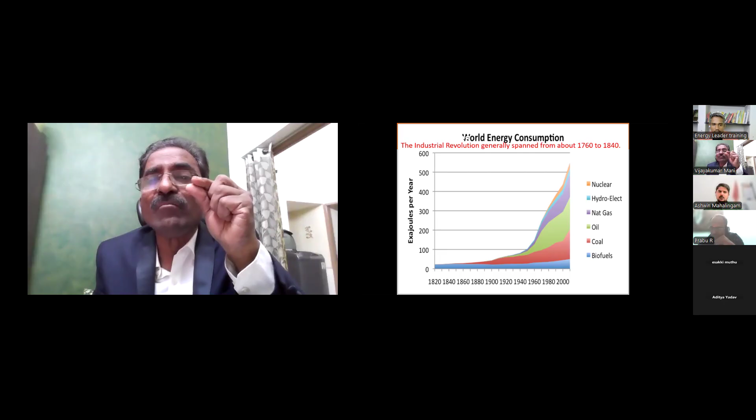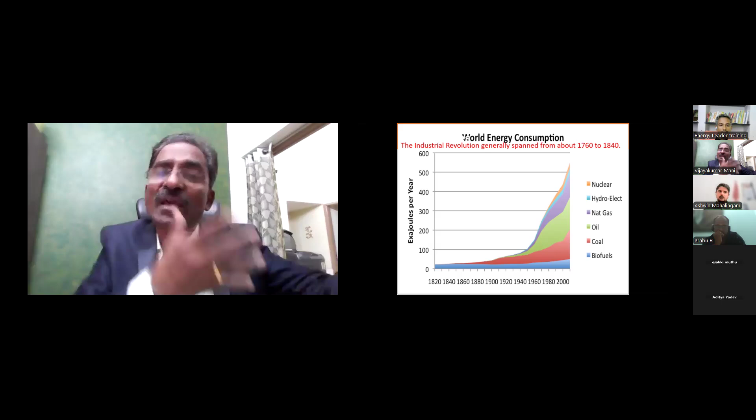If you see the world energy consumption, way back in 1760 to 1840 the industrial revolution took place. I studied this during my interaction with carbon footprint - somewhere in Antarctica they drilled holes inside the ice, went deep, found a small ice sample, melted it, and found the CO2 was very less. Over a period of time, after the Industrial Revolution, CO2 has increased more and more. Why did they take CO2 as a basis? CO2 exists for a longer period, that's why we call it CO2 equivalent. Why not take nitrogen equivalent? No, we take only CO2 as the equivalent - ton CO2 equivalent, written as t CO2e, where e is equivalent. Anyhow, we will come to those chapters.

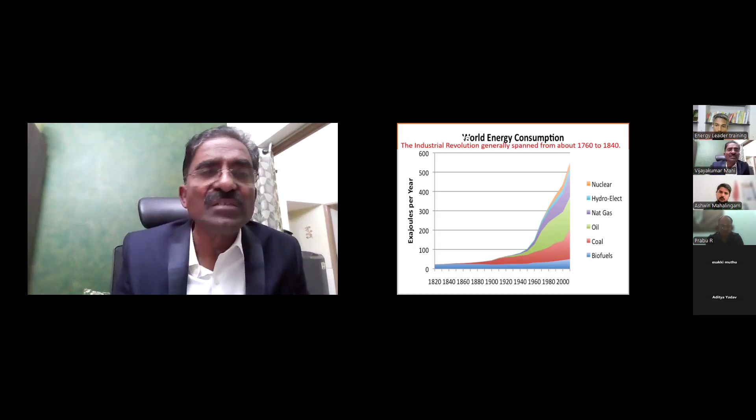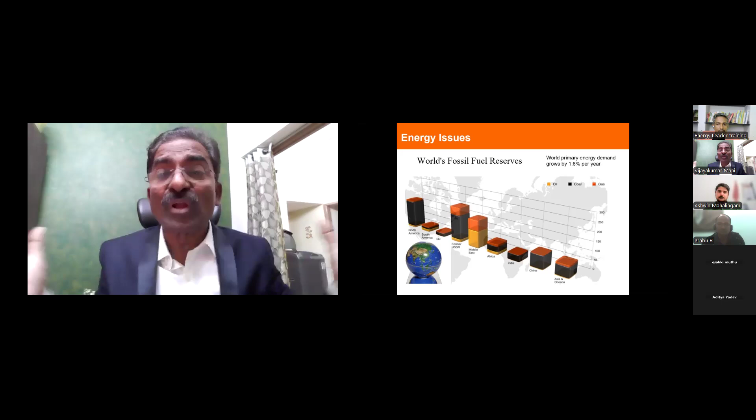India, as Modi ji has already said, has its 2070 target, and the whole world is looking at it. Various programs are being managed for this. Earlier, some 20 years back, energy audit was at a higher level, but now energy audit has gone down and sustainability is being talked about more. But unless we do energy audit, we will not be able to reach sustainability.

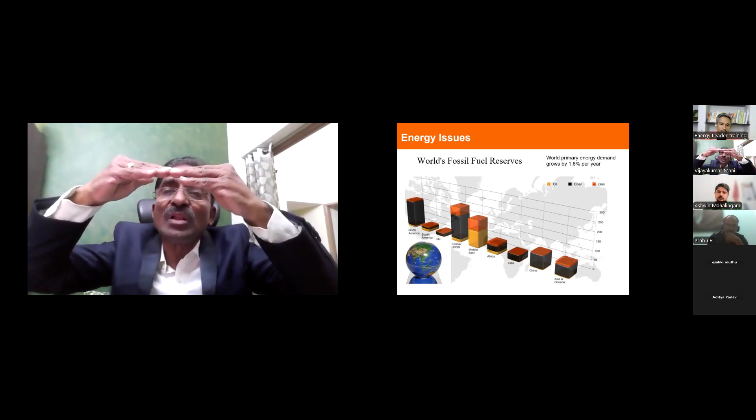People are not thinking clearly. Some people go directly to sustainability and find out their CO2 level is very high, and wonder what to do. Sir, why don't you do energy audit and reduce it? So people are coming back to energy audit. Now people are wise - they do energy audit first and then go to CO2 level, because with every energy audit you save energy, which means you are able to save CO2. Let us go to that.

I'll show you that. Oil will end by 2052, that is the prediction. Gas will end by 2060. And coal will last only for another 70 years.

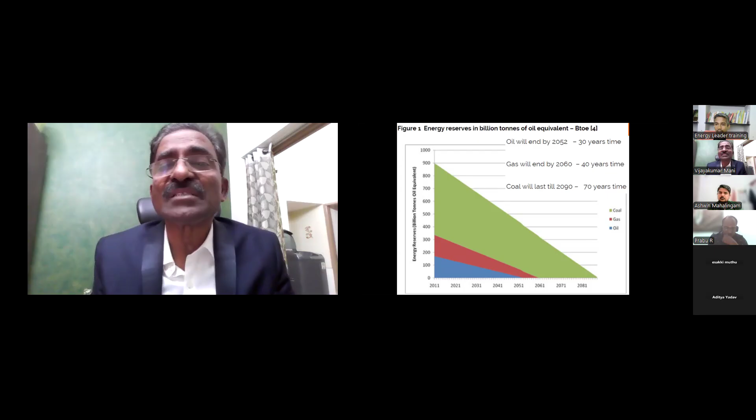What about the next generation? Somebody says, sir, I am going to live only for another 10, 20 years, so why worry. No, it's not like that. We should leave the planet to the next generation without any disturbances - that is the thought process people should have as they live and move to the next level.

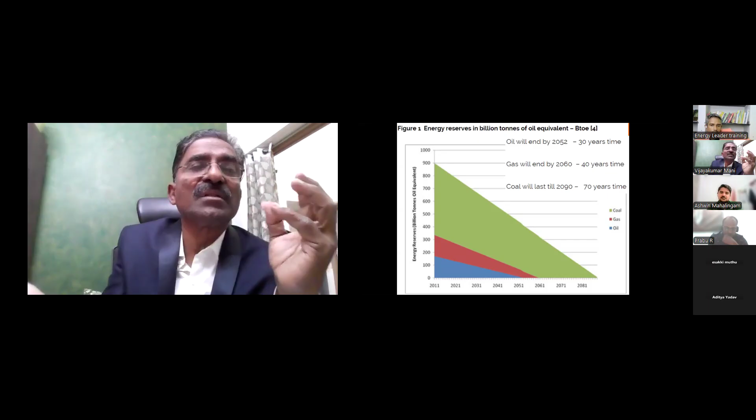One minute. Hello? Yeah, actually I am in a webinar, can I call you after some time? Yeah please, thank you. So other people are calling me asking if I'm in a webinar and can join. I told them to join - they will see me through LinkedIn and they are calling me through that. Anyhow, I told them to join.

So nowadays, though hydrogen is very costly, people are slowly adopting it because in a longer run it becomes cheaper. In all other countries things are going on. I am also an advisor in one company, H2 Next, which manufactures electrolyzers - water is converted. Recently I've been to a Butterfly gas stove manufacturer.

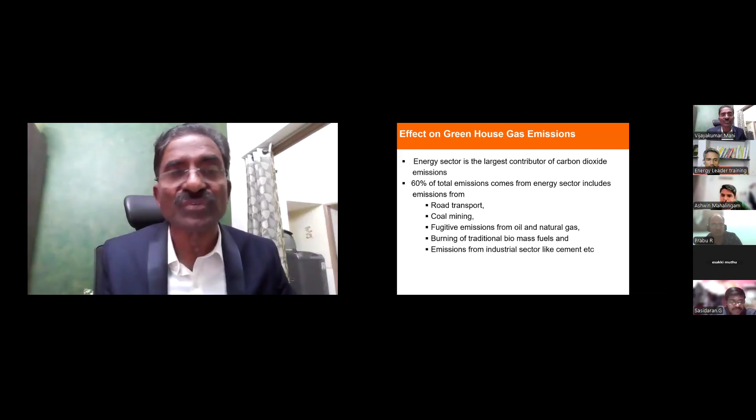So now we talk about greenhouse gases. Sir, why suddenly greenhouse gas? Because in energy audit, we need to know that when you are thinking saving energy means saving money, that is only a part of it. We are also contributing to the planet through the reduction of CO2 emissions.

Nowadays all companies are concentrating on energy, and adding one more column: I have reduced CO2 emission. That is the practice nowadays. Slowly they will tell you, sir, we are into two systems, 50001 and 14064 part 1. This is how things are slowly shifting towards that.

And now there is a carbon tax. Already EcoVadis is there, I think people are aware of it. EcoVadis in your company - ESG systems - they upload and get a certificate: platinum, gold, and all those things. I'll tell you all those things.

So these are the types of gases emitted. Carbon dioxide largely from fossil fuels, CFC - chlorofluorocarbons - that is from your air conditioners, and perfluorocarbons from solvents, and SF6. Nowadays SF6 breakers are not being used, or in the latest technologies they are adding some more gases to bring down the sulfur hexafluoride. The effect of sulfur hexafluoride on the atmosphere.

This is more harmful than CO2, but its life is very less. That is the reason why CO2 is taken as the reference value, because its life is higher, more than 100 years, 200 years, 300 years. Then hydrofluorocarbons from the foam products - these are all the various side effects from the products.

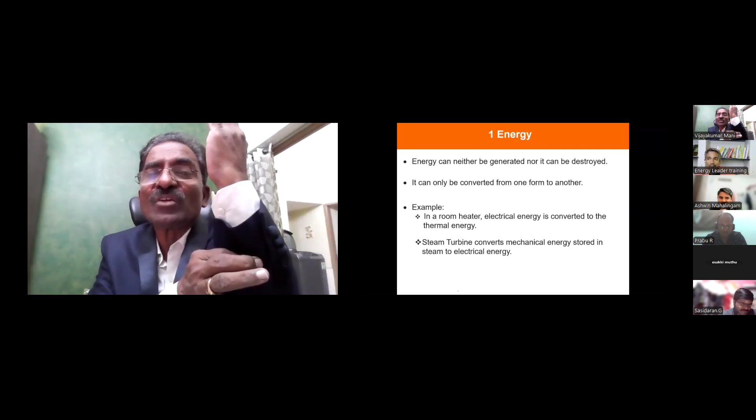You know, RYB has a 120 degree phase shift, and the central neutral point is 0. In mechanical engineering, what is that? I have a flag, I tie up 3 ropes, and the center point is 0 - what is that called in mechanical engineering? Lami's theorem. Make a note of it. Lami's theorem states that 3 forces acting at 120 degrees phase shift have a center point of 0. That is Lami's theorem. So a lot of things are there.

If you see, there are types of energies: primary energy, secondary energy, non-renewable energy, and renewable energy. You will be knowing this, no doubt at all. Renewable energies include sunlight and wind. I have seen that in China it's not only wind - there's tidal waves, in the sea and beneath the sea.

In China they are trapping a lot of energy. They have waves, they put some pedals, and the pedal moves up and down. Because of that they put on a solenoid and get the energy. Sky is the limit - you have to think of it. Non-renewable energy is like fossil fuels, and nuclear is also non-renewable energy, but of course we are using it. Natural gases, coal, and all those things are also non-renewable energy.

So for renewable energy, you can see all these things: biomass, tidal, hydro, geothermal, wind, and solar. Renewable energy can be generated continuously, practically without decay of source - that is the meaning of renewable energy. Solar energy, of course, we can use directly. There are 2 types of solar: one is known as PV solar, photovoltaic.

Another is concentrated heat. In Pondicherry, if you go there - what is that villa? I forgot, Auroville - Auroville, you're right. I've been there. When the Bureau of Energy Efficiency conducted our first exam, they took us to that place, Auroville. We went there, all the energy auditors who attended the exam, and we saw the dish - that concentrated dish where sunrays come.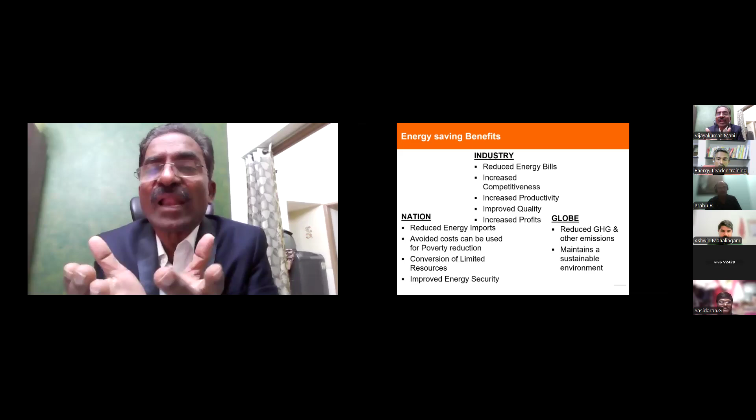Now I am still not come to special process. Now what is a special process? Any special process, suppose say welding. I'll give a colloquial example. Suppose your rice, you are cooking rice in an open vessel. Every time you take some 3 samples and check, oh still take 5 minutes to boil. Then after 5 minutes you check, oh it will take another 2 minutes to boil. This is known as normal process.

Coming to industry, I have a rod, 100 mm rod, I want to convert to 40 mm rod. I'm turning it, I stop and see the diameter. Okay, then I turn it again, I see the diameter. This is a normal process.

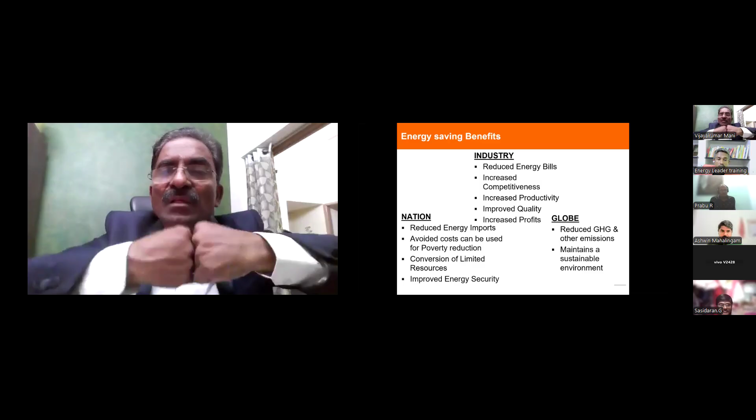Now, coming to welding, I weld it. At welding, I pass 100 amps, it is not joining. Then I put 120 amps, now it is joining, okay. Now after welding, process is okay. Now I'm giving one, one place welded, and it has to come to the second place for putting the bush. I'm having a doubt whether this weld is okay or not. Can I break it? If I break it, can it be used? It cannot be used. A special process is a process after completion of which, if I want to see the efficacy of that process, I cannot use it in the next process. That is known as special process.

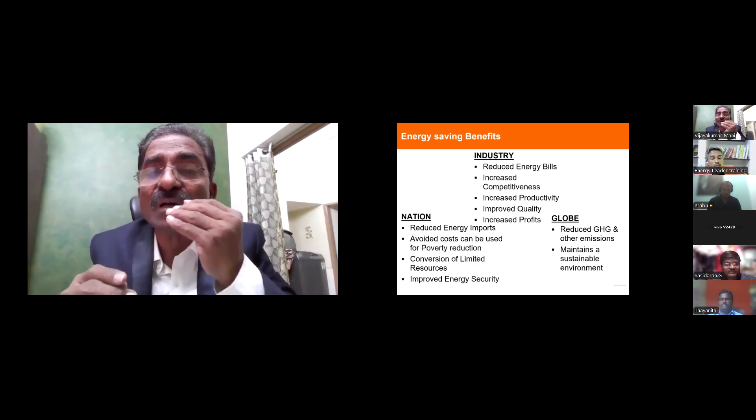I'll give a colloquial example. I want to prepare a cake. In a cake, I have the recipe - sugar, flour, sweetness, then pagam, then jaggery and all those things. I'm preparing it, I taste it. Not okay, oh my goodness, my recipe is not okay. Then I have to do iteration. How many iterations? Add more sugar, add more flour. In Tamil, I can say adarasam, there is one adarasam.

In adarasam, we put flour, white flour, rice flour, and jaggery, pagam. You mix it up - how many times do you do it? The new girl, after entering into married life, if she has to prepare the jaggery adarasam, she finds it difficult to come up to a level. It takes so many days and months to achieve that competency. The competency is coming here in the picture.

The standard says competency. Because when you go to a hotel, oh, food is good - what happened? The cook is good. Next day when you go there, hey, food is not okay - what happened? Sir, the cook has gone out, another cook has come. The competency is gone.

So here I'm talking about the special process. In a special process, you have to do iteration. Once you do iteration, you prepare a procedure known as validation of process. When people are doing validation of process, usually QA/QC people will do it, energy people don't come into the picture. Then I tell them, please add one column and write the energy. Every recipe you are adding and doing testing, add the energy. At one point when you say quality is okay, energy is okay - that is the place. That means your process improvement is there, small process.

So special processes need to be known by the electrical engineers. Mechanical people know special process, but they don't know the energy. We know the energy, but we don't know the special process. So it's not a question of electrical and mechanical - everybody should know the engineering.

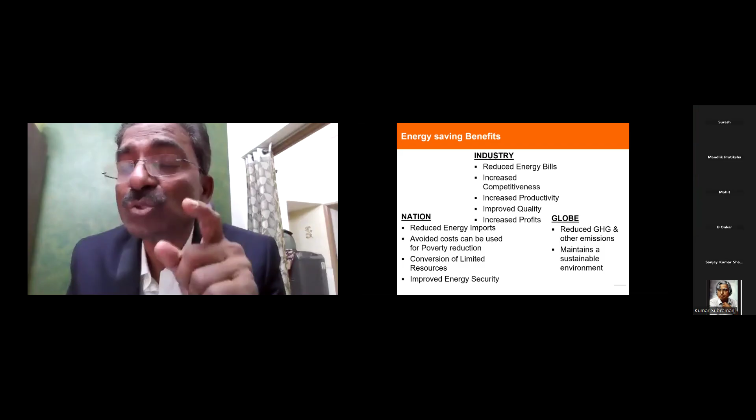You know why in lightning arresters zinc oxide is used? Do you know these gapless lightning arresters are made of zinc oxide? Why? Because its characteristic is that at a particular voltage it is an insulator, and at a particular voltage it becomes a conductor. That zinc oxide is sintered.

I've been in Hyderabad when I was with RITES, one company known as Oblum - they are manufacturing this gapless arresters. Then I was thinking, what is this? Magic is happening in zinc. Then I went to a training, I wanted to know heat treatment. I studied the heat treatment, I studied this sintering process. Then I came to know.

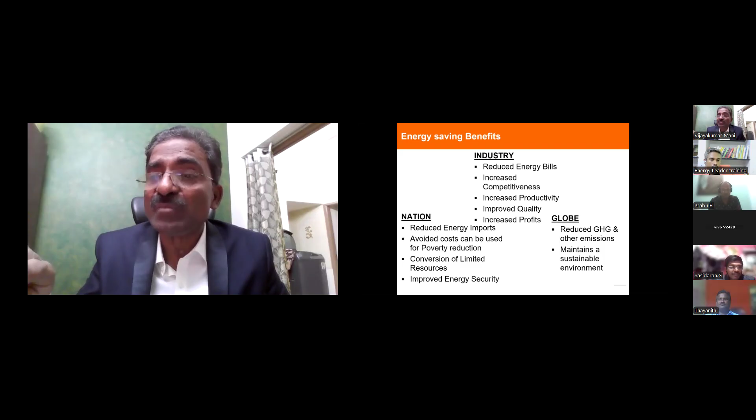I have experience in Gangappa cables in Hyderabad. These copper wires go through many special processes. I went to the lab, I went to production, took out 1 meter length of copper wire cable, put it in the testing room, cooled it for 20 degrees, and checked for the conductivity. It is not meeting the conductivity.

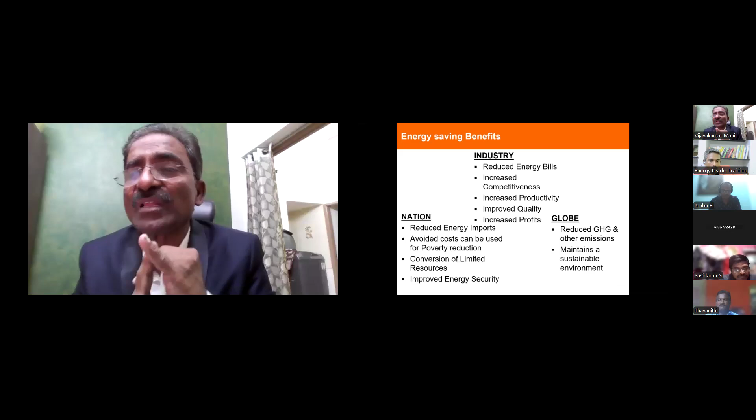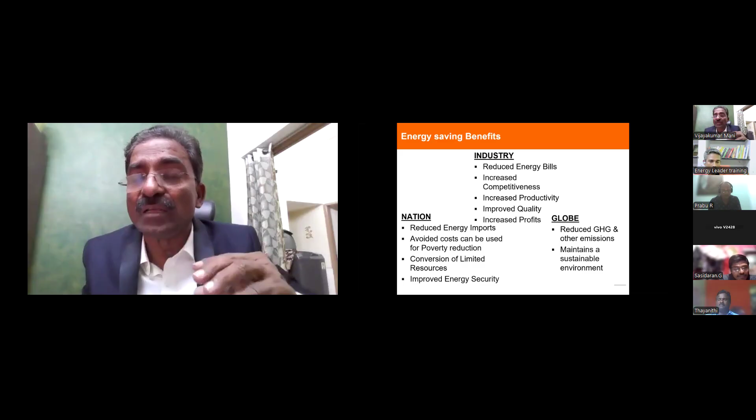I was wondering why. Then they sent this copper cable to the chemical lab. They found out 99.99% is pure. Then when it is pure, why is the conductivity low? Then we came to know it is hard drawn - 10 mm, hard drawn to 2 mm, 3 mm. When hard drawing is happening, the surface gets hardened. When the surface is hardened, you need to go into the metallurgy, the formation. Then what happened? I studied it.

Then I found out whenever you are purchasing copper cable, copper wire, it should be double annealed, tough pitched copper. That is a specification - double annealed, tough pitched copper. That means it is to be annealed, that is a special process. The surface heating, the surface hardness has to be removed through the annealing process. Then it becomes normal copper. Then they found out the defect, then it was once again annealed. Then it went through - it gave correct conductivity. So every process is important.

Okay, now coming to this - improved process, increased profits. Then what happened to the nation? Reduced energy import - you need not get electricity from other states, your own state you can use it. Avoided cost can be used for poverty reduction. Some countries use the saving energy to reduce and give it to poor people, they reduce poverty. Conversion of limited resources, improved energy security.

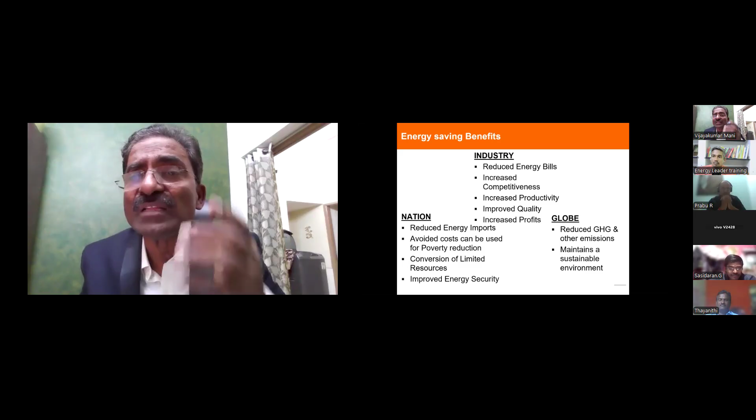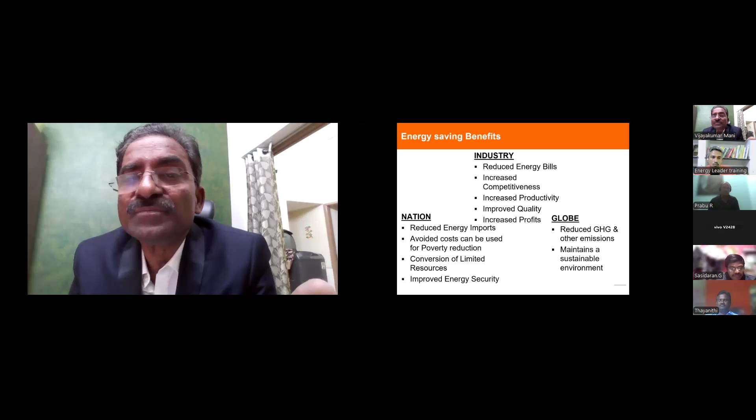As a global matter, there is no use telling that I've saved money - it is reduced with GHG and other emissions, maintaining sustainability, this is the key word. This has been done way back in 2011 itself. I have studied this, but I was not having the focus. Now only in the last 5 years I'm having focus on this GHG. Since 2020, during the COVID period, I found out this, I started learning this. But the real focus has come in the last 2 years. But I was reading that.

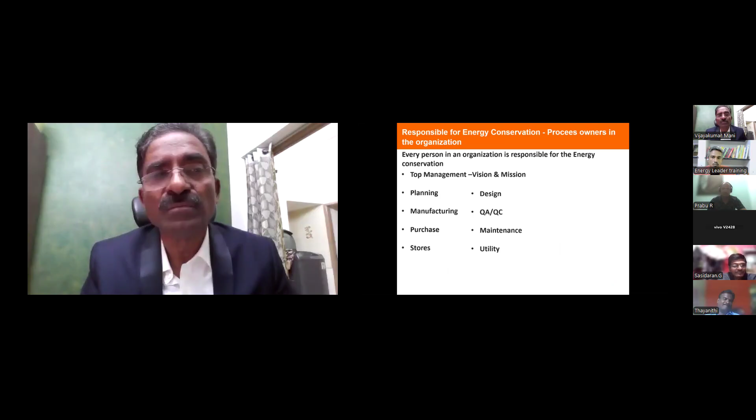So who is responsible for this energy? Some people will say maintenance. No, everybody - top management, planning, purchase people. Purchase people have to purchase energy efficient products. Stores people, production, everybody has to have a consciousness about energy.

From mechanical engineers, do they know about the Sankey diagram? Have they come across it during their studies? Somebody can answer so that I'll be happy. Yes sir, it was covered in the BE course, sir.

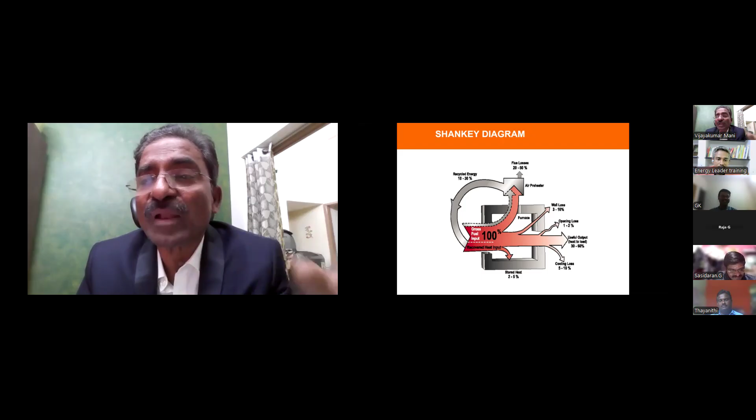I know that because I'm always living with the books. Not only do I do it practically, but also when I go to any company, people call me saying 'professor is coming here, he's a very dangerous fellow.' But I am not worried about that because I am what I am.

You should see - suppose a pump is not meeting requirements. I went to Kirloskar Pumps way back in 83, 84, 85. The pump was not meeting the requirement. He was scratching his head. I said, why are you scratching your head? Refer to NTP - Normal Temperature and Pressure. It was at a hilltop, at altitude. We brought it to sea level and atmosphere conditions - then it was meeting the requirement through extrapolation. Performance has to be extrapolated.

I'm doing a heat run test on a motor with F-class insulation. How do I know? We need not just nod our head that it is F-class. No - doing a heat run test alone is not sufficient. Strip the machine, check what insulating material has been used. The type test report will give this complete data. Exactly, the type test report alone. You personally go - I've been to many companies.

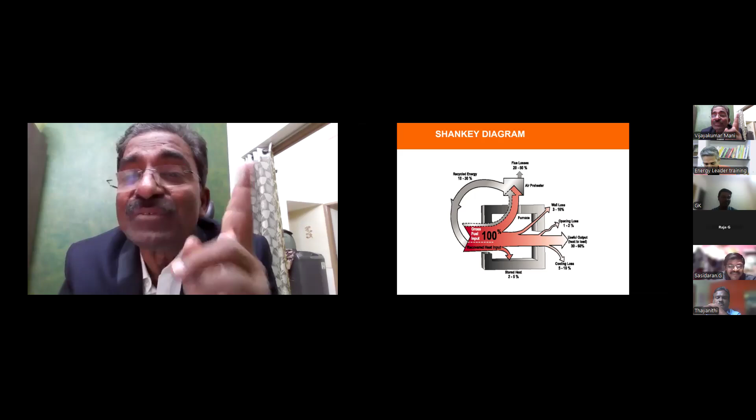I've stripped the machine. They put Hylam pieces. Do you think Hylam is F-class or B-class or H-class? What is that, Hylam? Hylam - there are two materials, paper-based and fabric-based. Hylam is the name of the company. You need to ask them what they have used.

If they used paper-based, it is B-class only. If they used fabric-based, then ask what varnish they used. If they used B-class varnish, it is B-class only. It's like a basket of tomatoes - one tomato is spoiled and the whole basket is spoiled. Similarly with insulating material, anywhere you see B-class, and if you say it is H-class - no, it's all totally B-class. That's what the British standard says.

People ask me when I go - hissing noises coming, why is there a hissing noise in the air? Sir, there is a leak. How often? Sir, every 15 days we are doing an air leak test. Then what use are you getting today? Sir, somehow it is getting managed. No - that means you are not catching the real point for the air leak test. Okay, so in an air compressor, calculate the flow per tank.

27th case study - have you done phosphating? In phosphating, I've used an air compressor. I never used an air compressor. The costliest energy in the world is the air compressor. Efficiency of the compressor is only 30%. 70% is going as heat.

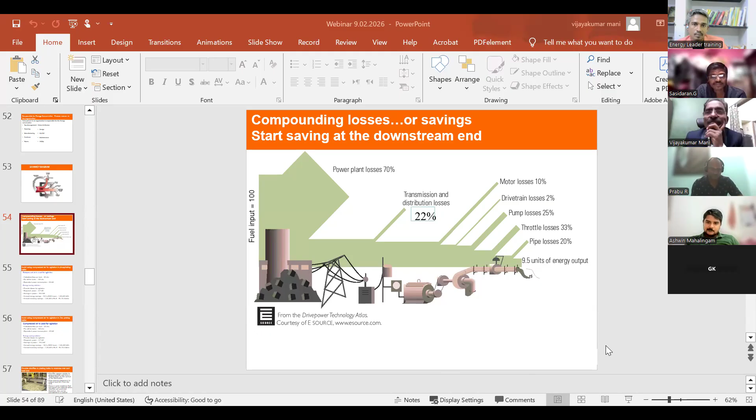There's a discussion about screen sharing issues - compressors, presentation screen, pressure vessel, full screen mode, and troubleshooting with function keys like F5, F6, F8 to get the screen visible, with participants confirming what they can see on their displays.

It's not necessary as a certification body, I used to go through the documents and say clear, but I was not keeping quiet. Got it?

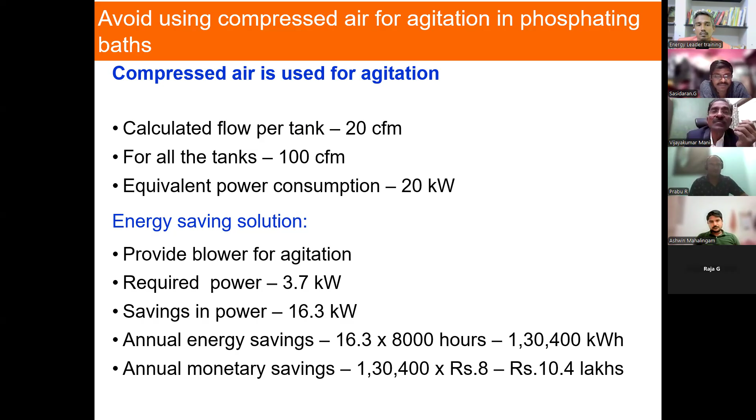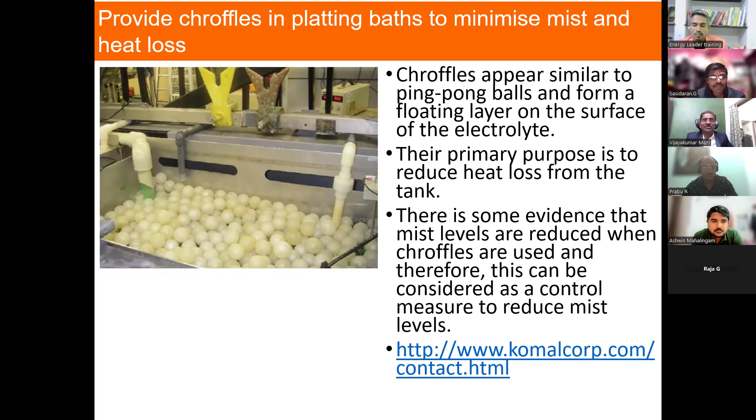The next one is the zinc plating, and the other one is in open tank - don't allow the steam to go out. Have these polythene ping-pong balls floating on the surface of the electrolyte. You can get it from this - I have given a website, Komal Corporation. You can contact them and get this material and put it on your plating bath, heating bath, so that it will not go through evaporation. Minimize the mist and heat losses.

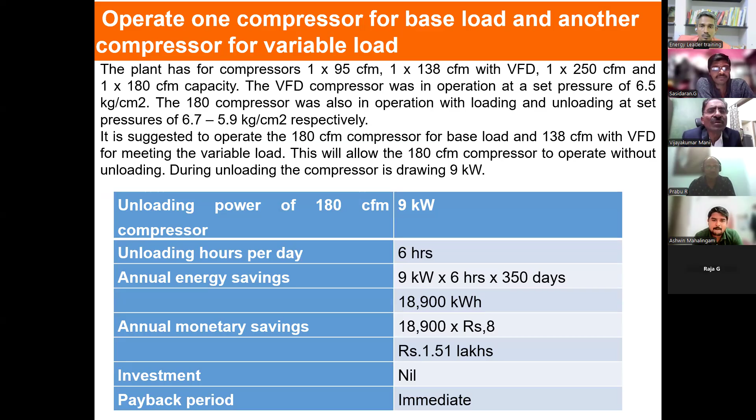Got it? So here operate one compressor for base load, another compressor for variable load. Don't go everything VFD drive, sir. There is a formula that we need to VFD drive - whenever there is a change in speed 60% of the time, then go for VFD, because your money is getting wasted between VFD drive and normal drive. So I used to tell them, always have some base load, put that as one compressor, and another variable load, go with a VFD drive. You can save a lot of energy.

Then arrest compressor air leak periodically - that is the costliest, that's what I was saying. Arrest compressor air leak periodically. When you arrest it, in this one case study, they were saving around 3.7 lakhs per annum.

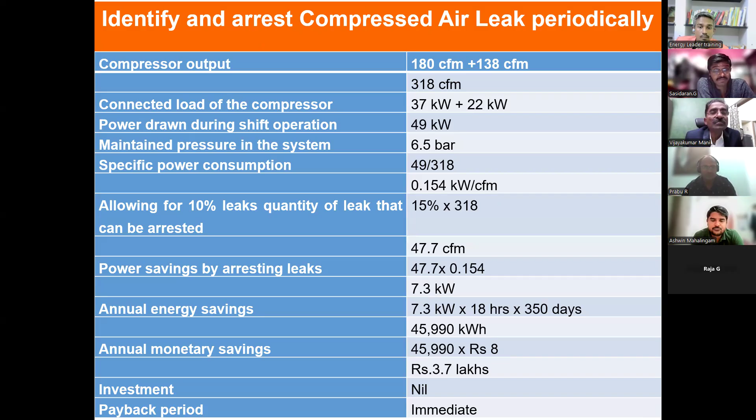Then enhance capacity - this I have gone through. One centering person, my goodness, they put the centering bath, this centering material in the heat bath. There was a space between the lower part and this. I said, why don't you put one more? And one more thing, this carrier material was 50 kg - let us say it is 10 kgs. Centering material is 10 kg and the carrier is 10 kg - which will absorb more heat? The carrier will take 50% heat and the centering material will take 50% heat. Then you're wasting a loss - energy loss is there, am I right?

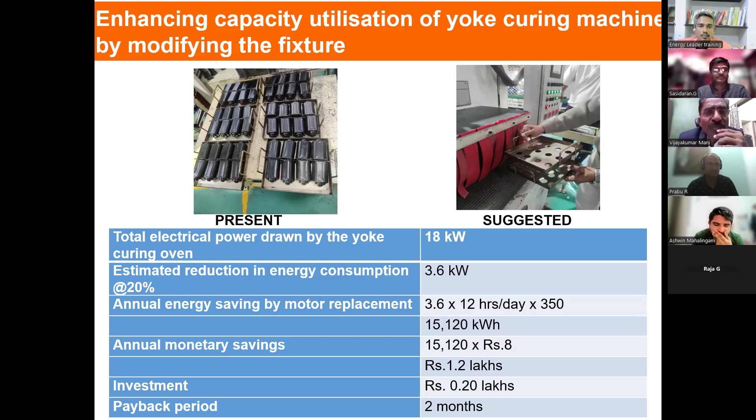Team members. Yes, sir. Yes, sir. All these small things, like convert hydraulic to electric.

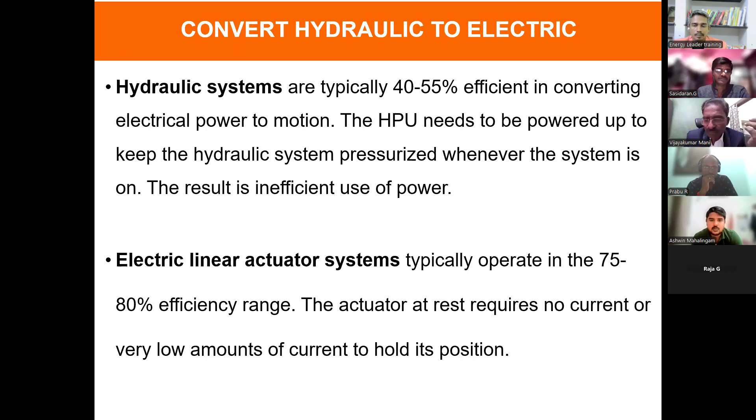I used to tell, never go for hydraulic. See, in hydraulic systems, the motor always continues to run to keep the hydraulic pressure. You'll be using NRV and all those things, but still the motor is running. Go for servo drives instead. There will be a lot of savings, around 75 to 80%. Huge savings. I'm giving a lot of tips on this one.

Convert press from connecting bracket machine from hydraulic to servo, that I have already seen. Then LPG heating to induction heating.

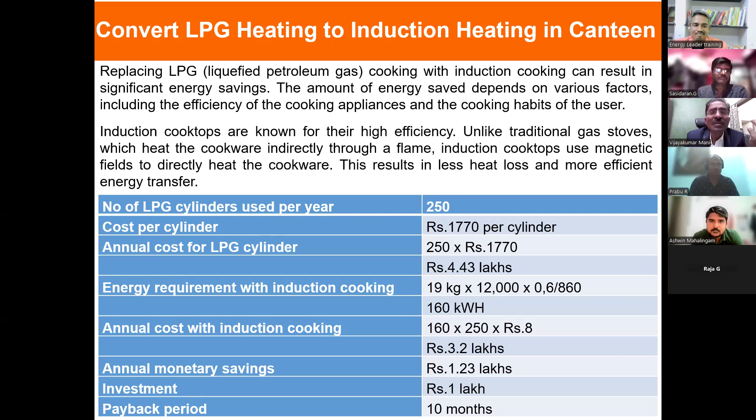Always use the pumps with the duty point. See the duty point of the motor and the duty point of the pump, both should join together at one point, which is the rated requirement for you, application-wise.

Sometimes I have seen some grand old technology. 'Hey, Baba, you want to lift that water to the third floor?' 'Sir, I require 2 HP.' 'Okay, no, it will be better you use 10 HP.' Then that means you are operating at the slope, efficiency is at the slope, that means your losses are more. Never do like that.

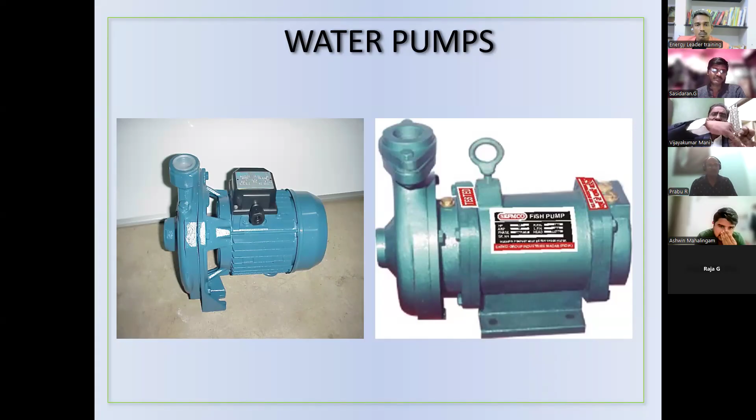Then air compressors. Your investment is only 15%, but there will be energy loss of 75% and 10% maintenance cost. The energy is the biggest part. If you see the life cycle, that's what the standard ISO 50001 says. When a person is procuring any motor, please check the life cost. Whether he has given warranty, on what component is giving warranty and guarantee, what are the losses, have you done the trial run when you are installing it? Have you heard about the sweep frequency response analysis, the SFRA test?

Electrical engineers. Yes, sir. Yes, sir. New transformer coming for erection and commissioning, we are testing it, sir.

Not only here, it should be done at the manufacturing place. When it is being transported, you have to do it here and compare these two. Sometimes during transportation, something would have happened. I have insisted when I was in Muscat, and people started incorporating this in their standards and POs: SFRA has to accompany along with the reports, because the gap between the core and the winding will be less during tilting like this. Sometimes we don't know, maybe during high current and short circuit current when it is coming in, it's likely to happen. But the SFRA is the best test to know the healthiness of the equipment, the transformers.

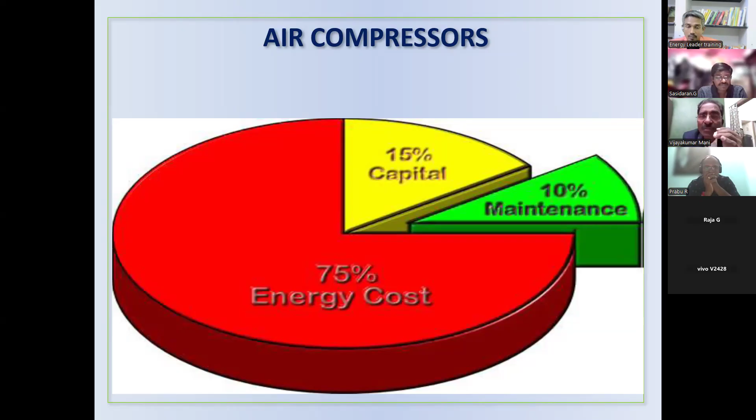Okay? I'm giving small tips, don't go deep into it.

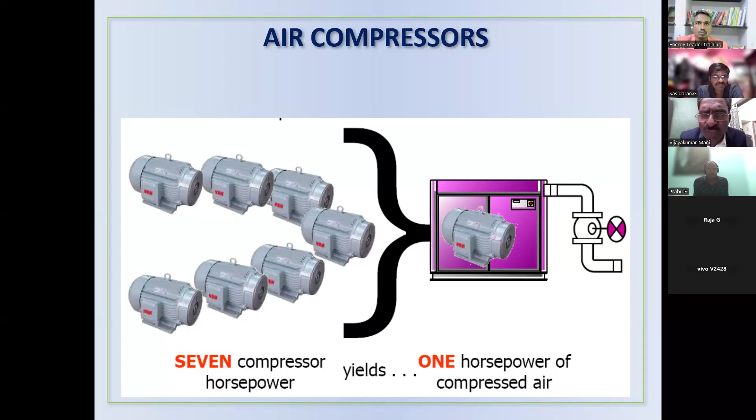Yes, sir. Never do that. Yes, I think I'm giving a lot of hints. Now itself, we can save a lot of energy. And there are many motors, pumps, blowers, fans, compressors, so many things are there.

This was what I was telling you, life cost. Always, life cost is very important. Then oversizing is very dangerous. When you want oversizing, the rating will come down.

See, this is one case. Actually, I want to use only 7.5 kilowatt. People will tell, 'hey, better to be safer,' and they will go for 15 HP in place of 7 kilowatt. And finally they end up with energy loss because their efficiency is around 79% as against 88%.

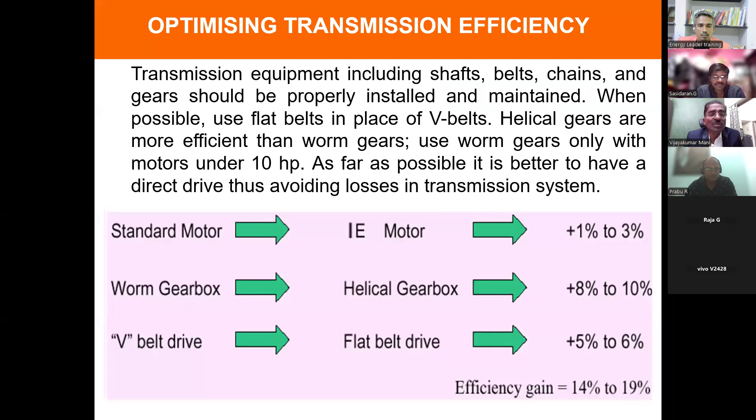So like that, okay. So electrical motors, maintenance, installation cost, all those things, cooling towers. I have taken a lot of case studies: IE motors, worm gears and V-belts, flat belts, soft starters.

So finally, now we are coming to energy audits. The energy audit is covered under standards. Does anybody know that? No. Energy audit is covered under ISO 50002. Anybody knows that? I want to know from the audience. Yes, sir. Oh, very good.

Very nice. So have you used this standard 50002? 'The 50001 we implemented in a cement plant, sir.' Cement plant, but 50002 - energy auditors should follow 50002, but no one is using it.

Okay, there are a lot of things when you go into standards. So every year I'm doing energy audit. By the end of the 3rd year, I'm losing it. Once again, I'm doing energy audit by the end of the 1st year, the 5th year, then I'm losing it. So the ad hoc energy management approach is there throughout the industry, throughout India.

When I go with a systematic approach, using an ISO system, I'm saving energy and immediately investing it. I'm having follow-up, monitoring and measurement, a system in place. Every time my management representative collects the data and analyzes it with the team and top management, and invests it. Now I'm able to see.

But initially there was no management system in place. Only energy is there. They do an ad hoc energy management system through an energy audit. They don't have ISO 50001. But when you bring ISO 50001 into the picture, energy is saved 2%, 5% every year. You are able to see that.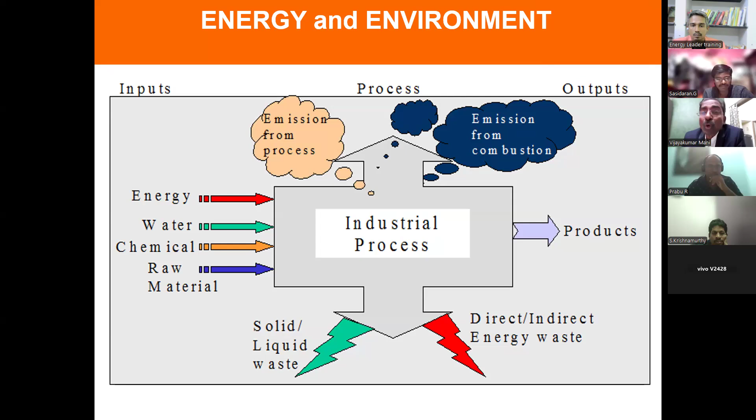And finally, as already told, when we talk about CO2, that is nothing but environment. Have you heard about SDGs, Sustainable Development Goals? Yes, sir. But nobody is linking it to SDGs. I saved energy, I'm saving one of the SDGs, you have to link it.

Which SDG do you want to link? For energy saving, I can link Goal 7. I can link 11. I can link 12. I can link 13, climate change also. You need to finally tell them it's climate change, Goal 13.